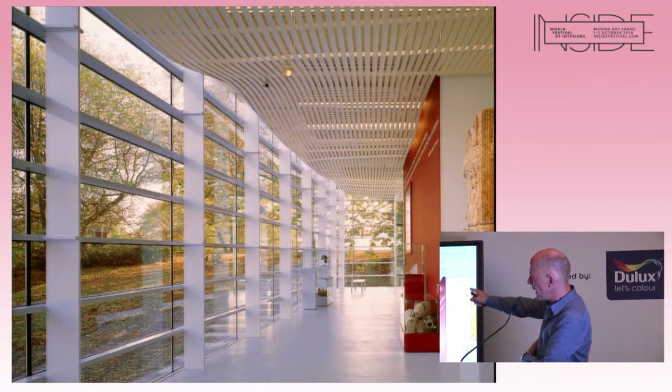Like in this case, this is an earlier project whereby the ceiling is almost doing the whole job of the project, whereby the ceiling brings you to the upper floor of this museum. It's a mirror of the landscape around the project, a topological mirror. It plays with the idea that it is a blanket going over all the technical requirements of the museum, and it plays with the idea of the way it guides you through the whole museum. So it's also a kind of wayfinding element, as you can see here.

The second big detail is the stair, because it's a stair within a stair within a stair. You can meet in the stair, you can find the different programs in the building through the stair, you can sit on the stair. The stair is actually helping to support you to find the different entities in the building, together with the ceiling. So these two elements do the whole project, or make the whole project.

Like maybe in an earlier work, the Möbius house did. The Möbius house consisted of maybe only two materials, glass and concrete. Like the Möbius structure, it goes from the outside towards the inside.

When the parents are in the living room, they wanted to have contact with the family, like the kids, sorry. But they didn't want to hear them. So they thought when they come home late, then they can wave to us and go maybe nicely to bed, but at least we have a contact, but maybe we don't have to see them.

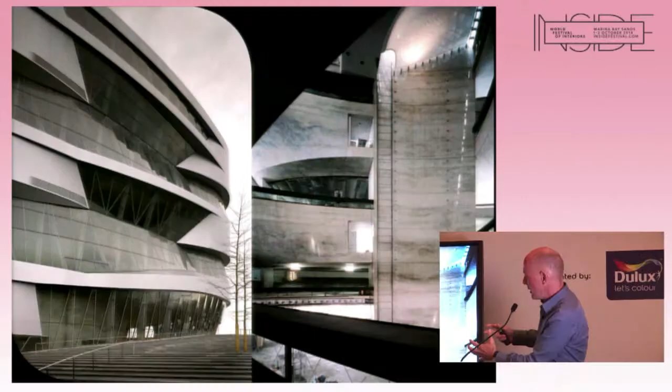In that sense, this void space became the texture of the whole project. It became the internal texture of the way you would move around and characterize the project in many different ways. In a way, it was for us also not purely a showroom, it was a museum.

We convinced the client that if you go to the MoMA, for instance, and look up and see the helicopter hanging in the MoMA's foyer - if that is a product considered a cultural object, why could the car not be seen as a cultural object in this museum? Luckily enough with that, we were able to draw much more attention from a larger public coming to this building.

But maybe going back to the topic of working around this idea of the bigger details and the void space, and the idea of how we could create a kind of social sustainability - this building in Stuttgart, also in the same location where the Mercedes building is, deals with this idea of social sustainability and what we call lately action design.

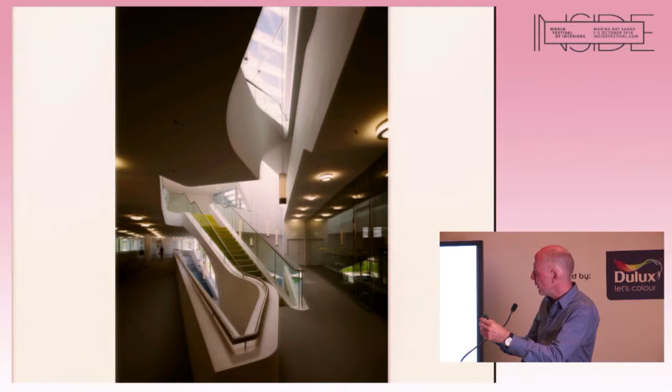It is very difficult to find the elevator in this building. People have to use staircases. People would meet on the staircases, exchange knowledge on the staircases, socialize around the staircases, and they could see wherever the different programs are through the staircase within this building.

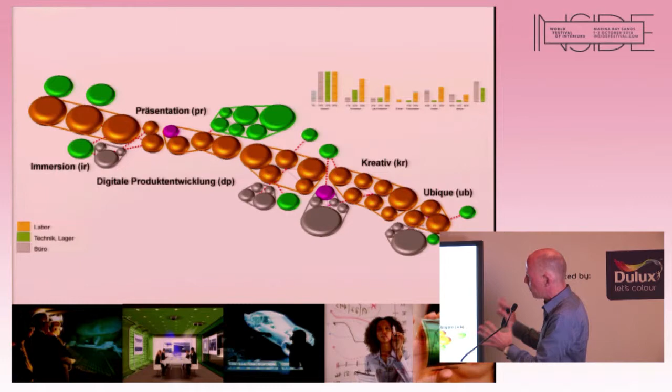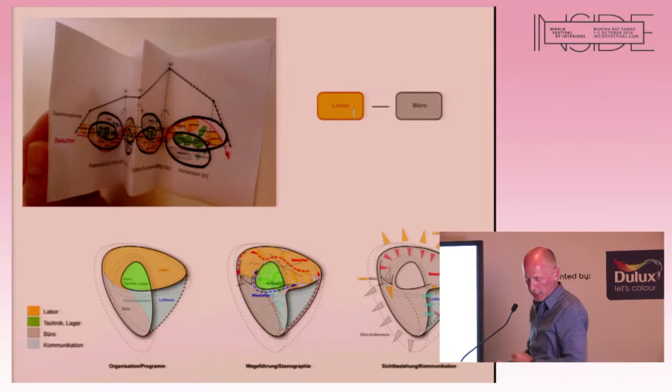Through different techniques, we thought about the high amount of flexibility we wanted to create with this enormous amount of programmatic activities within the project, and studied in many ways how the program could be applied to quite an open system. So we had the central void space again, and around it we had these different fields for the laboratory spaces and some office spaces. The building in section is grouped around these laboratory spaces.

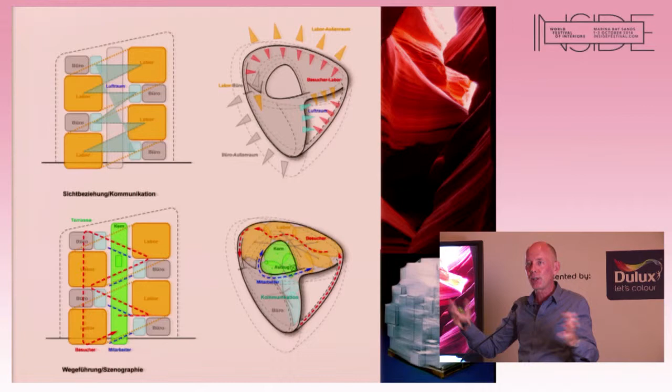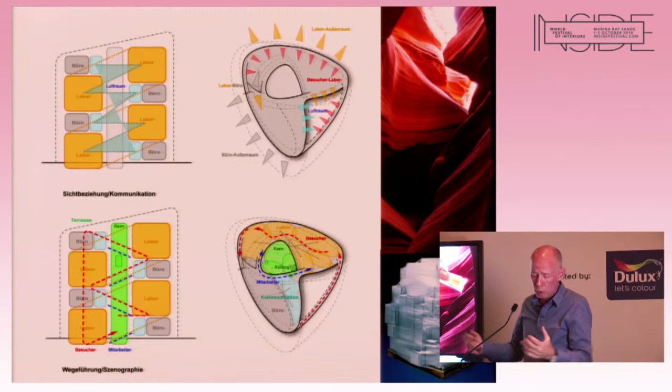This is what the client wanted - they wanted to use this project as a future building of how one would work in the future, connected to this idea of work. Meeting each other, seeing each other, and that the central core became the wayfinder was very important, as was that the building could always be changed and use different programs.

So you can see here the void space made it possible to always connect yourself to the different layers of the project.

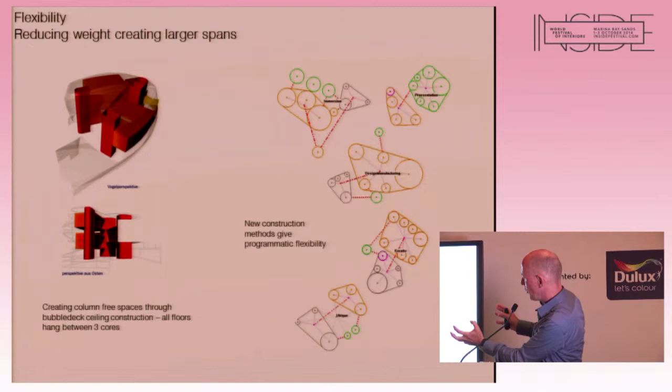Another aspect was to work with the vertical movement where necessary, so that it became the stabilizer of the project, meaning we didn't need any columns. So as long as we could, we tried to study how the cores could be placed in relation to the methods of programmatic flexibility, so that it would be easy to construct the whole project around these three cores, and make the building, as you can see here, quite transparent.

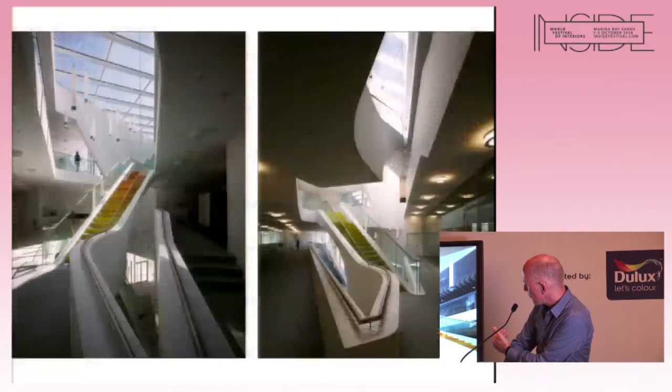The colors of the stair are related to which floor you are on, so that you would never lose your way when you are moving around the building while not using the elevator.

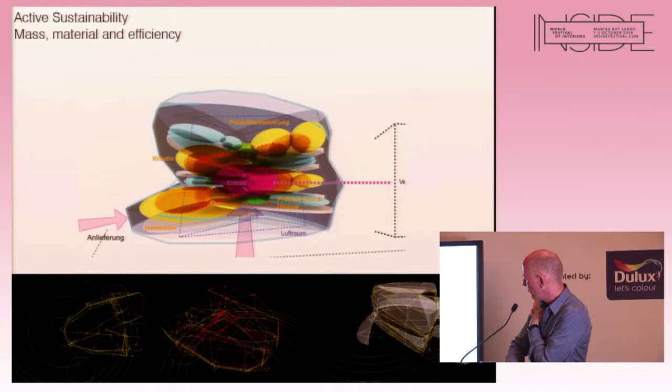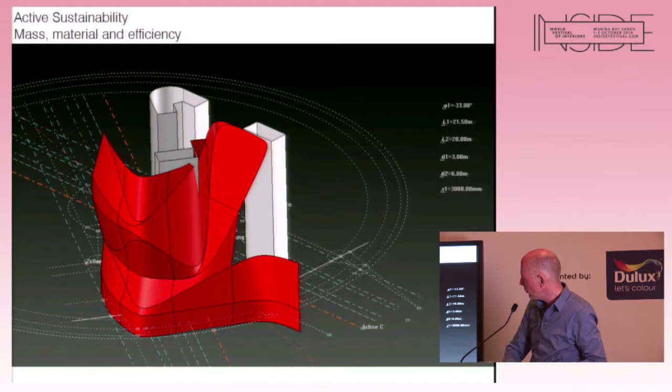So mass, materiality and efficiency, around a constant testing of moving forward with the idea of the external texture of the building, and the internal texture, was key to bringing this theme of future work together in this building. Not only on the social sustainable idea, but also the full sustainable idea for the Fraunhofer Institute in Stuttgart.

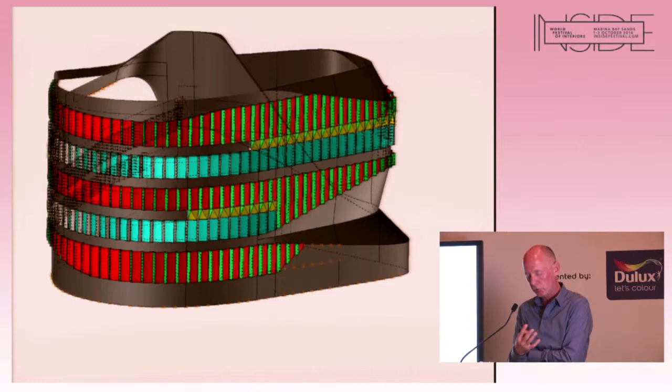This was very important for them because it became a prototype for many office buildings they did in the future. You can see the windows move in two directions in order to shut down the light and heat coming into the building.

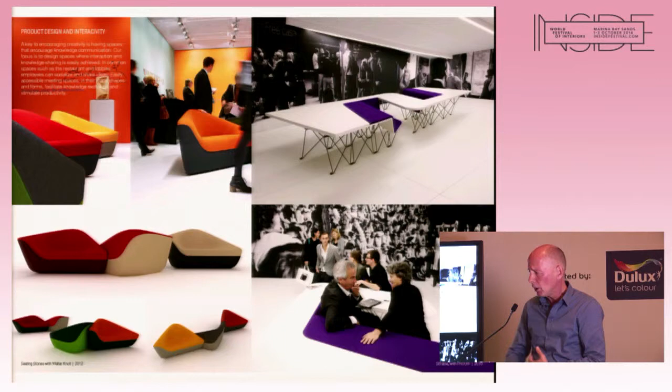This brings me to the smaller scale projects we do, the furniture. This is called the sit table. It's a very popular table, luckily enough now among startup companies. They love it because you can sit in the table, but you can also sit around the table. It becomes almost like an architectural element.

You can move from one office space to the next because you don't need so much furniture with this project, since it's one piece of furniture that can be used for many different activities. Whenever you have a small meeting, a lunch, or a client around, you can have a workshop around this table. It's now used in many places, not only in office spaces but also in libraries.

So we move the larger details from one project to another in a serial manner, bringing these ideas together through the design of several projects, and bringing the knowledge together through these larger details.

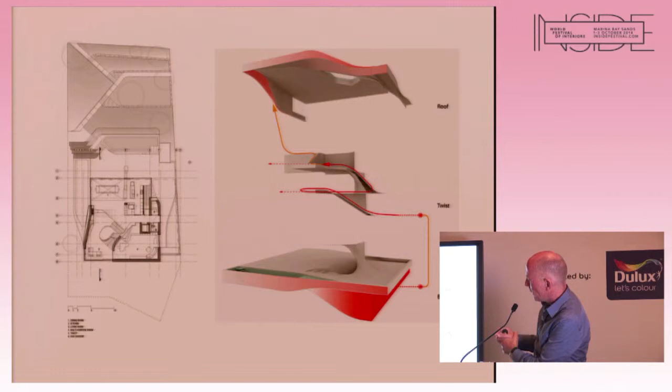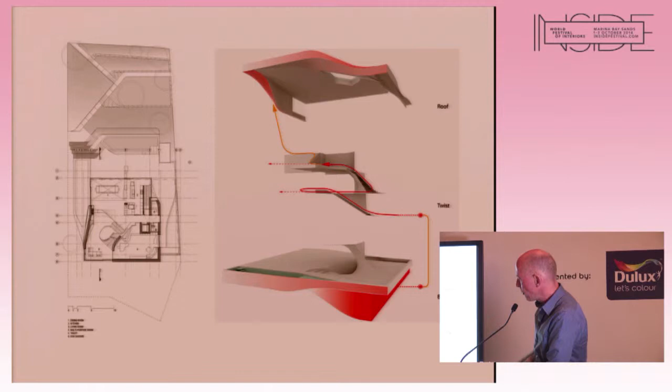This is another home where the idea of working and living together is central to the design, whereby in the upper part and the lower part of the house you have different areas to work and live together in a family arrangement, like in the former house I showed you.

Again, you can see the cantilevers. It creates an enormous amount of flexibility within the organization of the ground floor area, not only because of the work and living relationship on the ground floor, but also to have a connection to the view of the surroundings. You have a beautiful wine mountain on this side of the village, near Stuttgart.

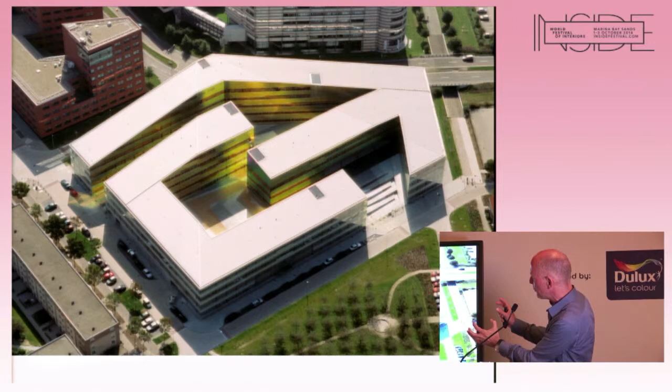Maybe a last project I'd like to show you is one designed in the center of Holland, where this mirrored facade creates, in the central void space, a very important relationship between the people working in the building and the internal court.

The internal court creates a kind of place for lunch, where people come together and look at the time of the building, because the colored facade, with this particular foil we introduced, changes into almost 7 or 8 different colors.

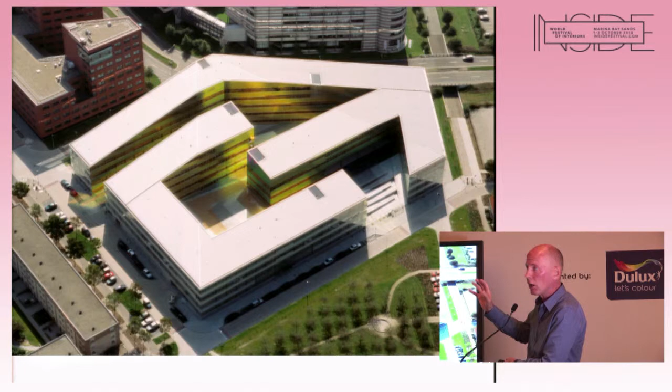Whenever the light comes onto the facade, it creates a colored shadow into the patio. So whenever it is lunchtime and you see a yellow color coming onto the ground of the courtyard, people love it. They say, oh gosh, it's yellow time or green time, we can go for lunch.

You can see the effect here of how that works, and how over time the project became a place for parties, or a kind of meeting place for reflecting for a moment, not only exchanging knowledge with the members you work with, but also to seclude yourself from the rest of the group and be on your own.

And even when there isn't a sunny day there, it's as if you are always in a sunny day.

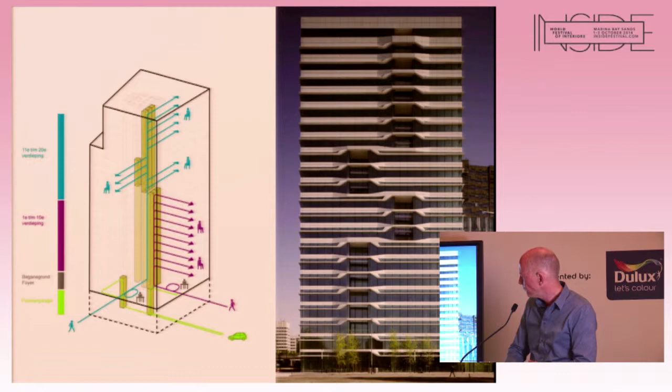But I have to be careful with how much I show you, because I can talk endlessly, as architects always can do. Maybe one of the other work environments of a project I was recently connected to is a project in Holland again.

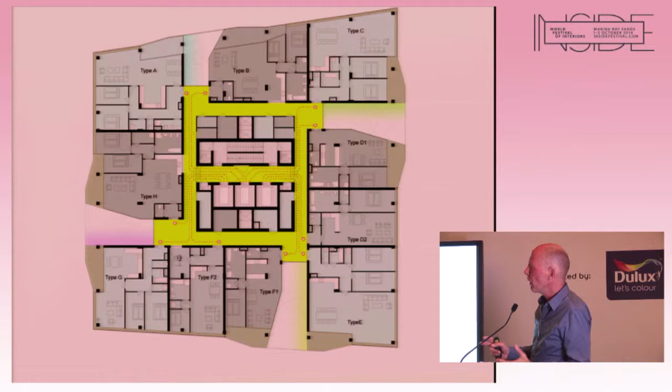In this project, an office space layout can be turned into housing. This is the latest discussion in Holland, because we have so many empty office buildings, and the amount is growing so fast that the new value for creating these office spaces is to be able to convert them into housing.

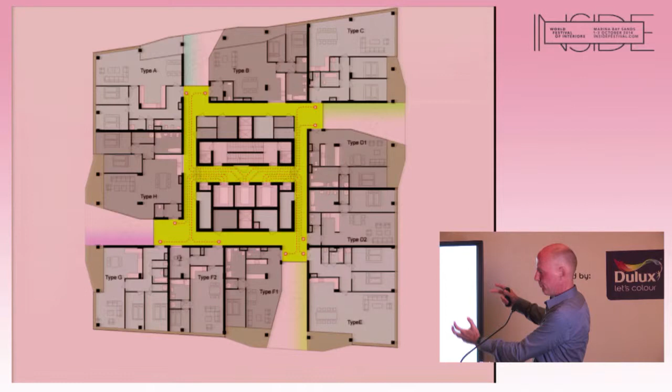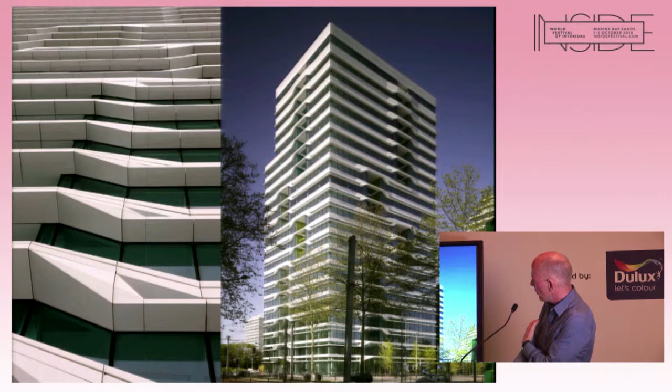You can see the ground plan is quite fat and bold. So we had to bring in these courtyards within the project in order to bring daylight as deep as possible into the project. The skin of the facade, as you can see on the top, is much more closed down. If you go to the lower part of the building, it opens itself up more, to create more light in the building but also to reduce the heat load on the top.

I think whenever we design houses or work environments where people can work at home, or in an office building, we know that today we work in so many places, we can work even around the corner if we want, to do architectural work. Today the work environment is no longer focused on the workspace as we used to work in before.

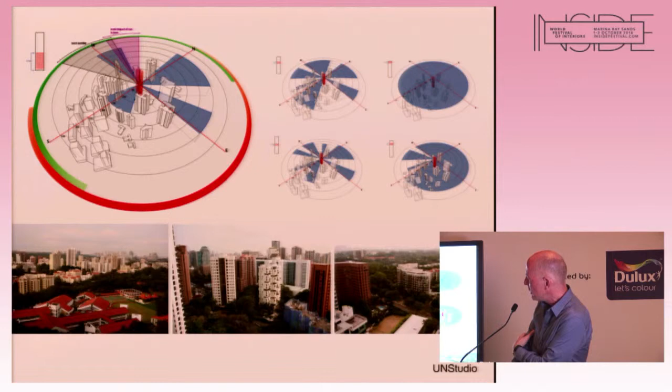Maybe the last project I'd like to show here in Singapore, where similarly this idea of working and living is introduced in a quite compact zone here on Ardmore Park. It's called Ardmore Residence, and I hope you have time to visit the project. It's a place with the organic, beautiful landscape of Singapore.

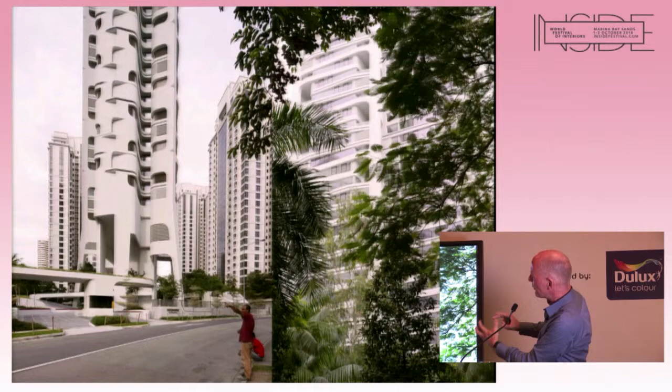If you come from the airport and drive into the city, it's almost like driving into a park with all these wonderful trees around you and bougainvilleas. This organic quality of the facade plays with that idea of the landscape of Singapore, and how that landscape can grow into the lower parts of the buildings in the city.

We like that idea, that the articulation of the facade plays with the idea of the landscape in a more planar, organized quality found in the city. The idea of how the building works in its environment is as if it is fitting, connecting itself easily toward a project next to it.

But if you come closer, you see the texture. So that was the idea, that it would be an amorphous project like I talked about before. It would create after-images only when you come closer to the project, and create much more texture when you go even further into the project.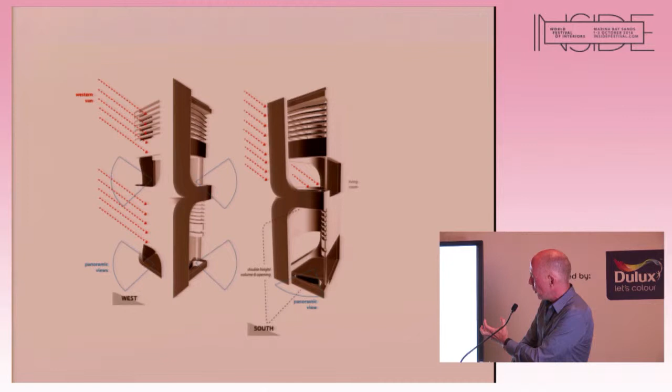For that we worked a lot with the idea of the heat load coming to the building, so that it would filter out the light, making it possible that you wouldn't have too much heat coming into the apartments, and that you wouldn't view down into the apartments of someone else.

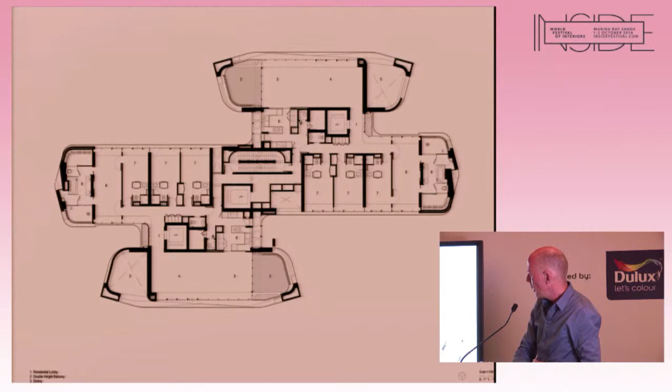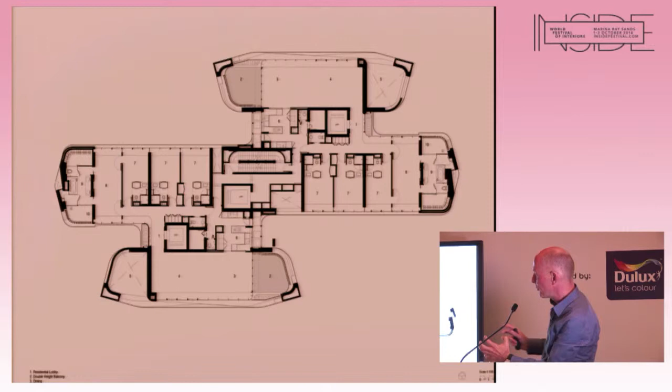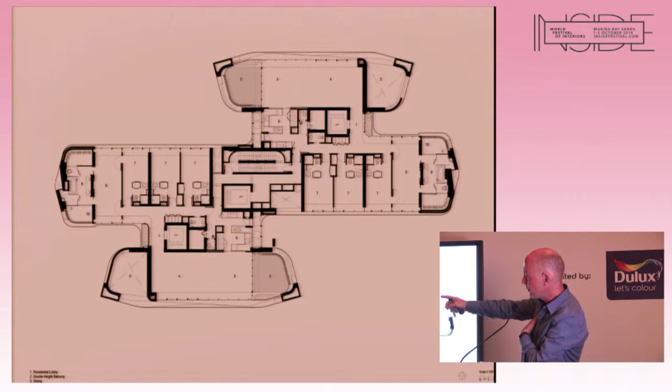The layout is quite simple and organized. It has a core on the side, a vertical column system, and no columns in the middle, so you have a total open panorama towards the city. In the middle you have the possibility to make a workspace again, or either have two guest rooms related to the master bedroom.

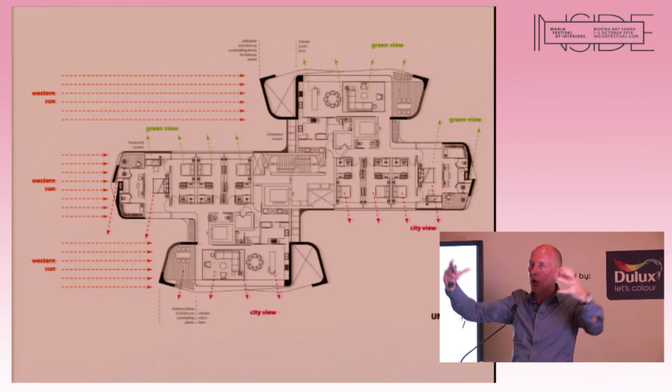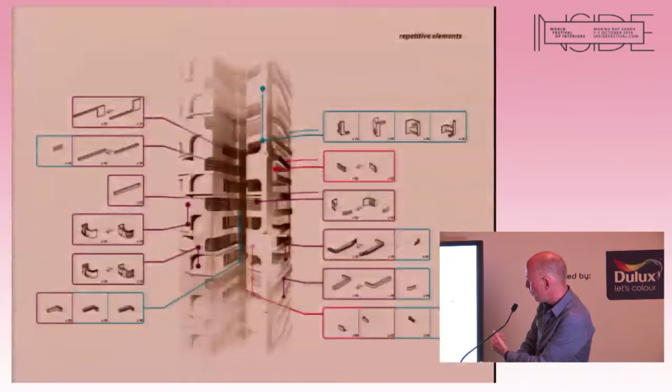The building is organized so that everything related to sunlight going over the building is protected on the side, so no sun load goes into the open side of the building, only on the edges, on the sides of the project. As you can see, no columns are used, and for this reason we could even work with glass fins to keep the panorama very open.

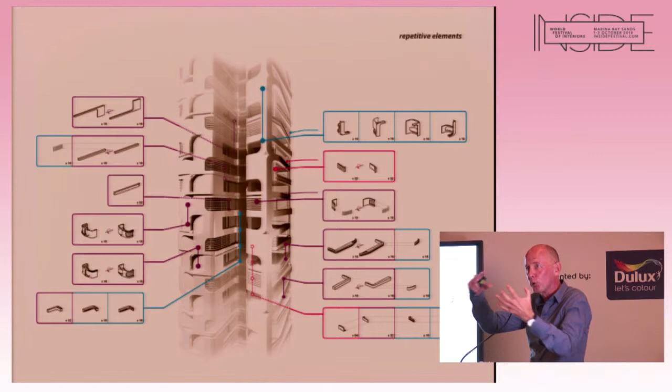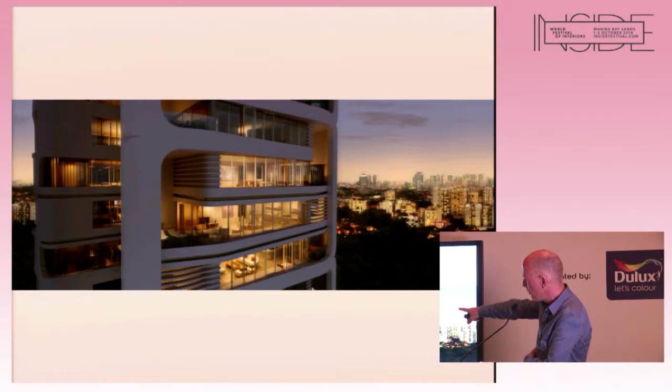You can see how it works here: double-height balconies connected to one apartment, and if you go one floor higher, the next apartment has the next double-height balcony. That was introduced to catch all the wind coming into the apartment. At night, you could open your window and all the wind comes in a very soft manner, related to a 24-hour life of working, sleeping and living in this environment of Singapore. Thank you very much.